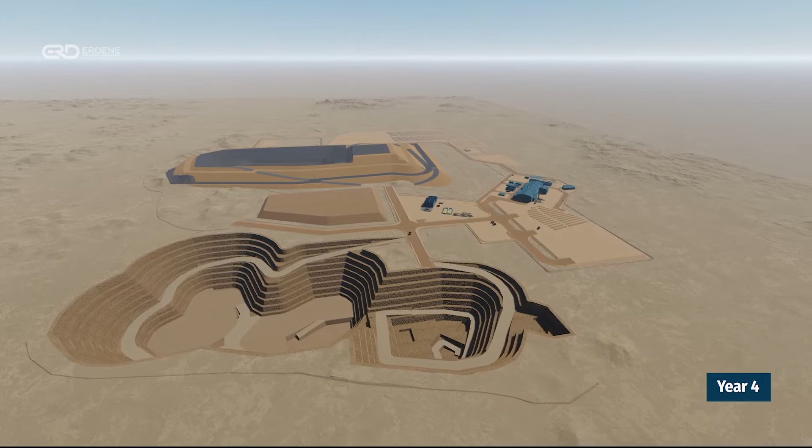The open pit will be developed in stages over 7 years. Initially, topsoil of the mine area will be stockpiled for future environmental reclamation, while an integrated waste facility, or IWF, the first of its kind in Mongolia, will mix coarse mine waste rock and processed fine dry cake tailings. Subgrade material is currently treated as waste, but is designed to be stockpiled separately within the integrated waste facility nearby the process plant.

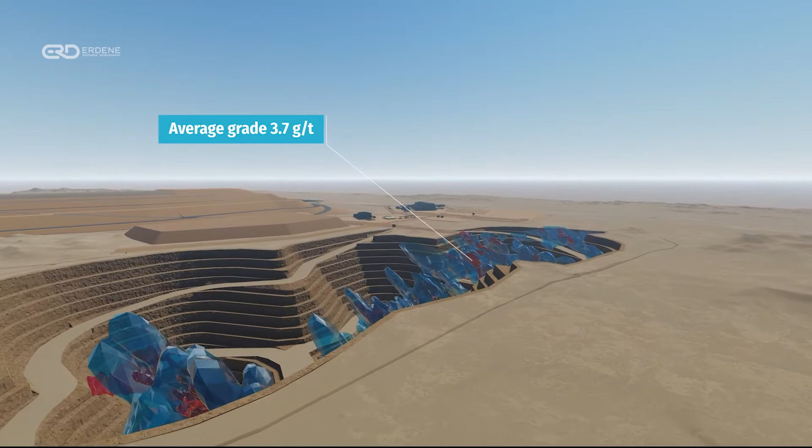The relatively flat landscape is ideal for plant construction, while the high grades allow for a relatively modest plant size at 1,800 tons per day, or 600,000 tons per year, producing on average 63,500 ounces of gold per year, with in excess of 75,000 ounces in year 2.

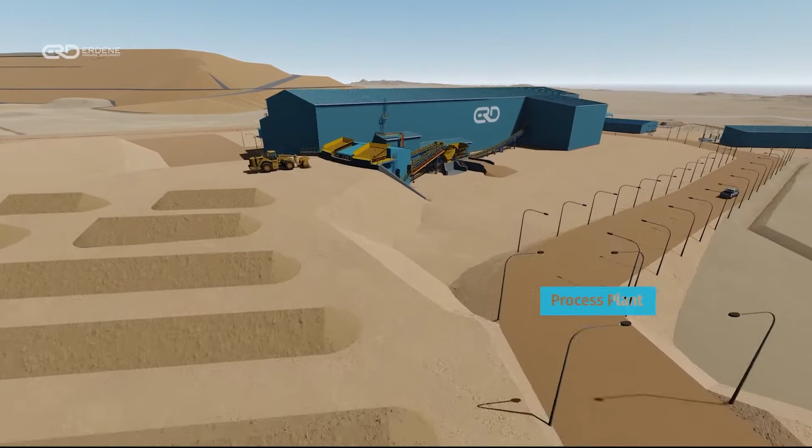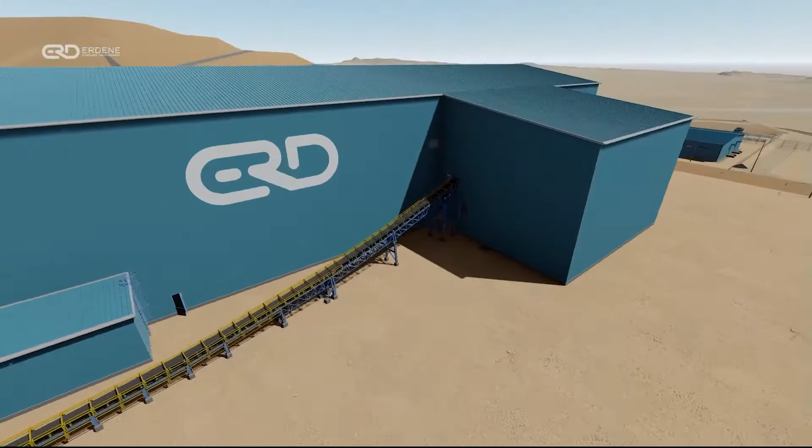The blasted ore material will be trucked to the run-of-mine pad and onto the comminution circuit. The development incorporates conventional crushing and grinding, leaching, and a carbon-in-pulp, or CIP, plant. The plant's crushing circuit includes jaw crushers, a SAG mill, followed by a ball mill. Ore will be ground to approximately 60 microns to allow for maximum recoveries.

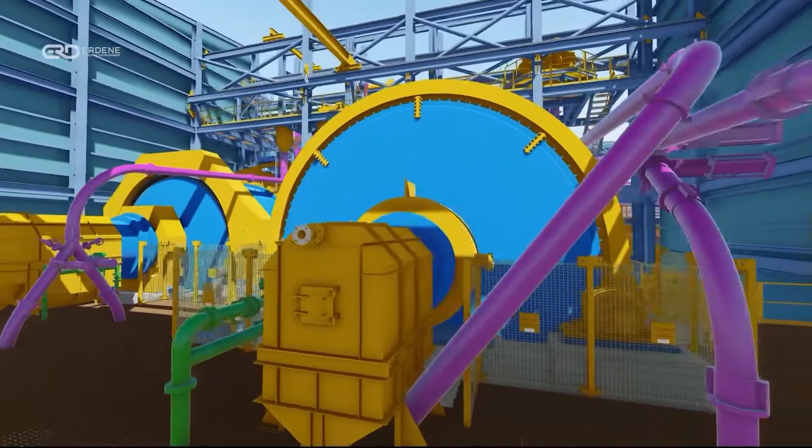Water for the comminution and leaching circuit will be sourced from a nearby bore field 3 kilometers away, which has been approved by the government of Mongolia.

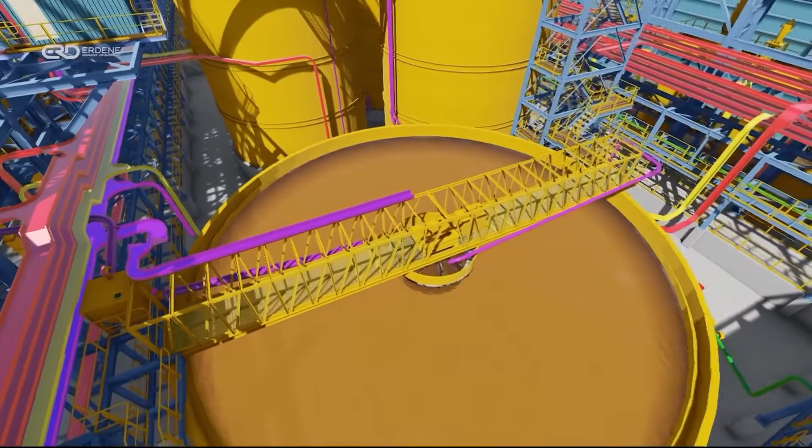Following the grinding circuit, the gold-bearing ore is introduced to the leach tanks at 42% solids, where it is agitated into a cyanide-bearing solution for 36 hours, which frees the gold from other constituents.

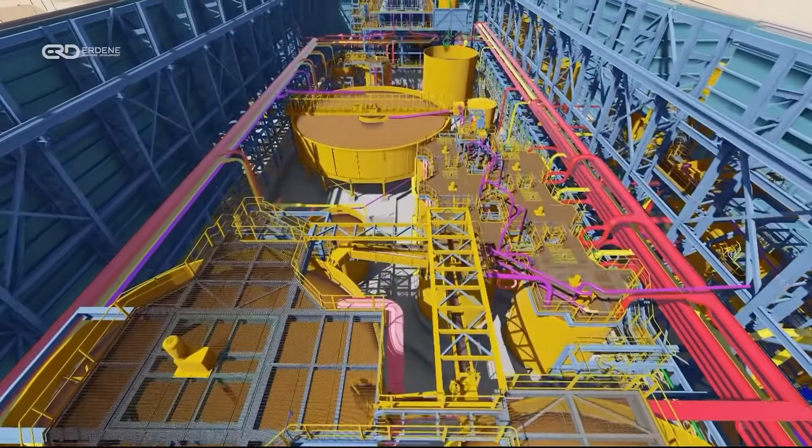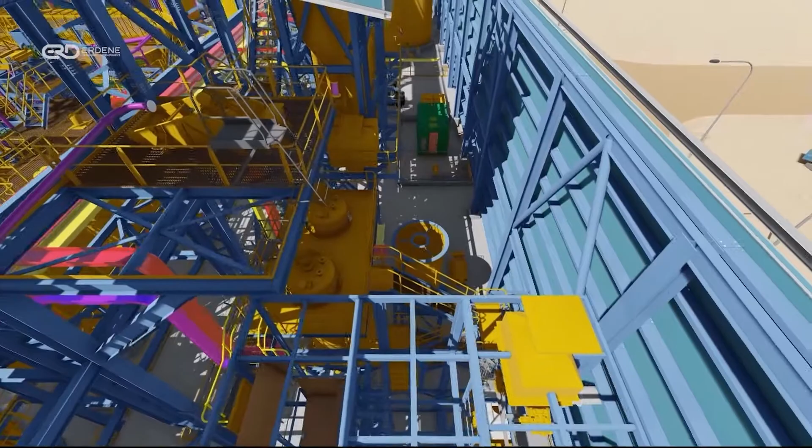Once the gold is released into the solution, it flows to the carbon-in-pulp, or CIP, circuit, and carbon is loaded into the tanks. The carbon acts like a sponge, attracting the gold, following which the relatively coarse gold-bearing carbon particles are separated by screens, hence the process carbon-in-pulp, or CIP.

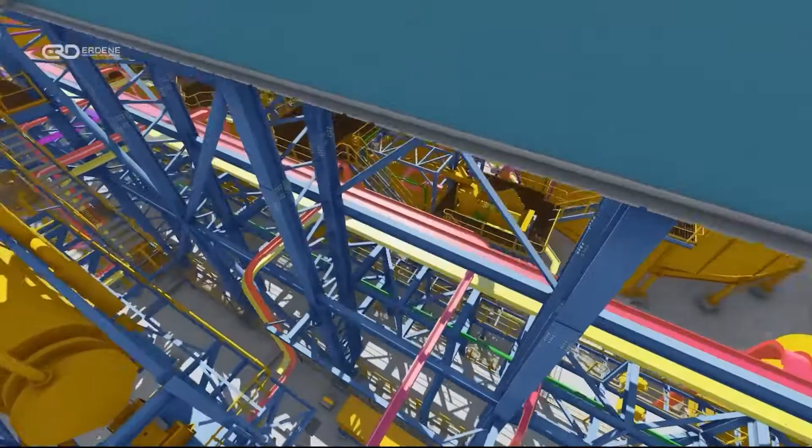Introduced in the early 1980s, CIP is regarded as a simple but effective process that can be used in uncomplicated ores. The final loaded carbon is then removed and washed before undergoing elution, or desorption, of gold cyanide at high temperature and pH, followed by electrowinning, where eluate solution circulates through the loaded carbon, extracting the gold.

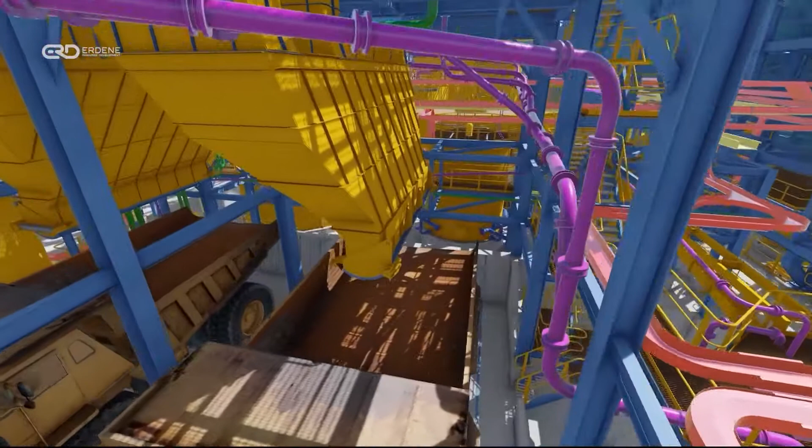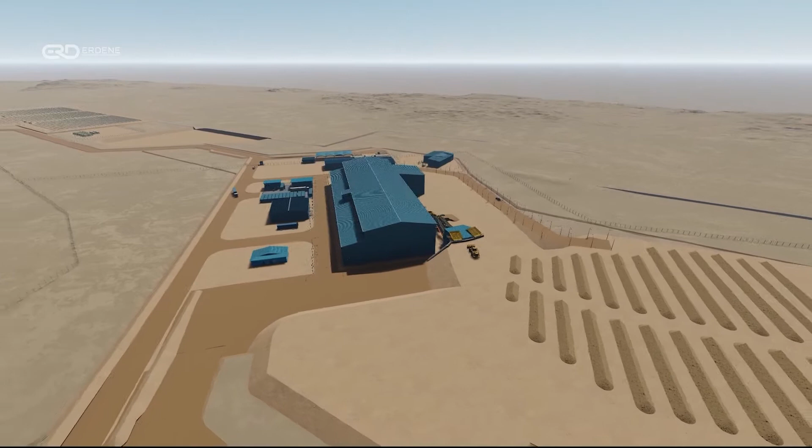The plant is designed to recover 85% of the water, with disc filters used to separate water from waste. Treated water is recirculated for use in the plant. The dry tailings will be stored at the integrated waste facility, where treated tails are transferred to cells built of inert waste material from the pit and lined by clay and synthetic membrane liner.

To support the mining operation, a maintenance workshop has been included in the facility's design, with a separate bay for maintenance of light vehicles. The fuel facility also separates access for heavy and light vehicles.

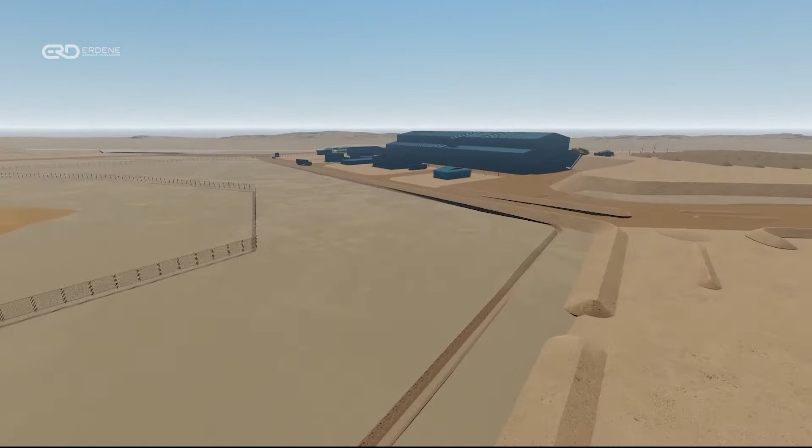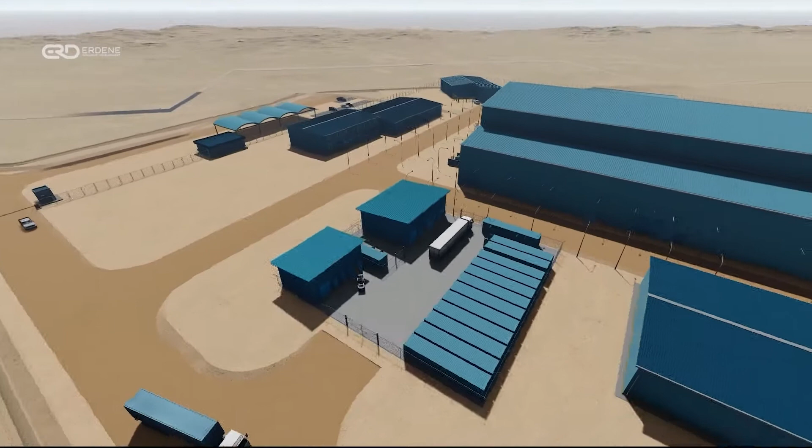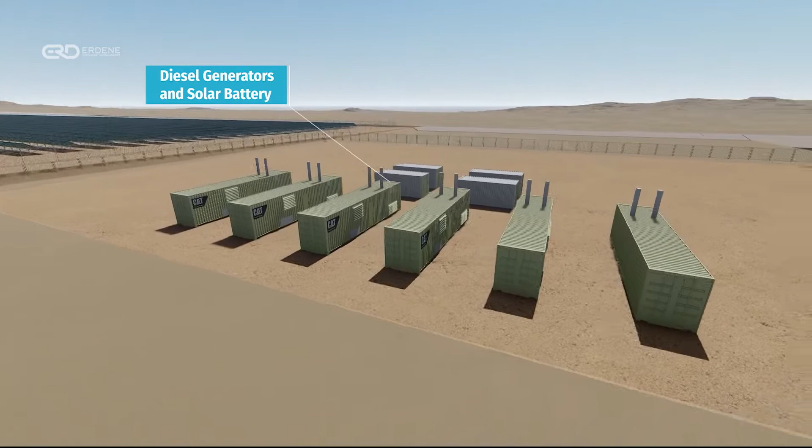The Bayan Khundii mine will be powered by an off-grid hybrid power station, a combination of diesel and solar generation components and battery energy storage. With the hybrid power station, Erdene will be the first mining company in Mongolia to use solar generation as part of the power solution. The mining area, process plant, and administrative facilities are all within 1 kilometer of each other.

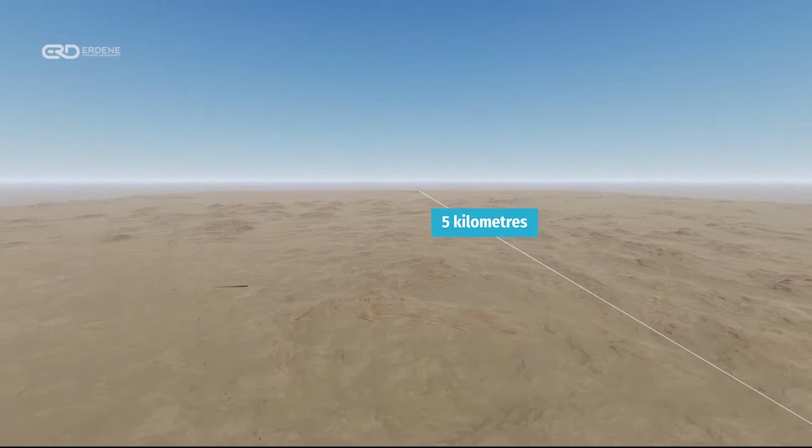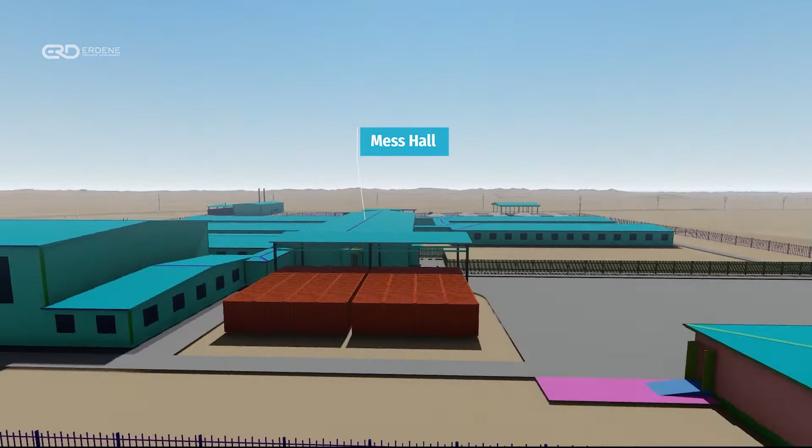The permanent accommodation camp will be built approximately 5 kilometers north of the mine and plant complex. The camp will feature traditional Mongolian gers and modern facilities outfitted for staff comfort, designed to house 300 engineering and mining staff.

The Bayan Khundii Gold Project is the foundation for the development of the Khundii Gold District, where Erdene Resource Development continues to discover and grow its gold resources.